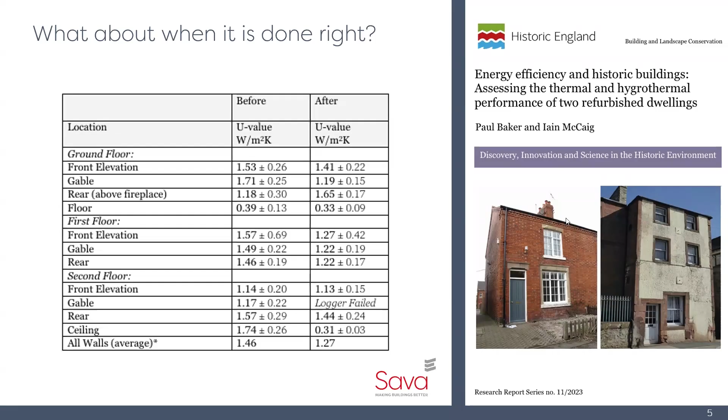But they also looked at the other side of it - is it going to cause a problem? Is it going to make something go wrong? Is it going to be an unintended consequence? They found that there kind of was, insofar as there was an increase in relative humidity within the structure of the building. They left data loggers within the wall collecting information about moisture levels, and looked at it - one of these buildings they looked at for 7 years, so they got some really good long-term data.

What they found is that yes, it was getting damp in the winter, but in the summer it was drying out, and drying out to a point where it was okay. As we all know, moisture is a problem, but it's a problem if it hangs around. If it gets wet and dries out in a reasonable timescale, that's no issue really - it's just passing through, moving in and moving out. It's kind of how these buildings were intended to be.

Also when we talk about vapor permeability, we talk about breathability - that's how they're supposed to function, and to their mind that's what it was doing. Now of course it was hanging around a bit longer than it might do otherwise, and what they found was the material they used was retaining water against the wall, but still drying out sufficiently.

Obviously, you can't be certain - it's just one building, just one period of time, really ideally should know better. But from what they did, they said there wasn't an issue, and it's all really good. I like the study, it's well worth a read if you haven't read it already.

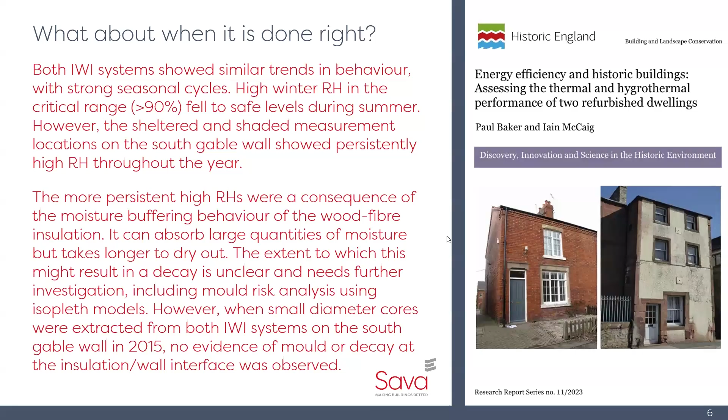With that in mind, I want to talk about cavity wall insulation, particularly in terms of location. We've been retrofitting insulation into our cavity walls for quite a long time now - it's a relatively common retrofit. It's probably the first of this, other than maybe upgrading windows - the first of the major retrofit projects that took off and was carried out. So it's fairly well understood stuff, isn't it?

We know we have our exposure zones, and we can refer to where our property is on the little map, and identify the exposure zone. That tells us the extent of water we're expected to get in a heavy downpour - how many liters per meter squared per spell of wind-driven rain. Depending on what area we're in, we can refer to that approved document and decide what level of protection the property needs from wind-driven rain.

Because obviously, if we're going to insulate a cavity, we are bridging the internal and external wall, which means we've got a route for penetrating damp. One of the biggest drivers of penetrating damp is always going to be wind-driven rain. Obviously we've got gutters and bits and pieces, but wind-driven rain is always going to be the biggest driver of it. So we know that if we're in an area of severe wind-driven rain, we're going to have to protect the property. We know an external masonry wall is never going to be 100% watertight.

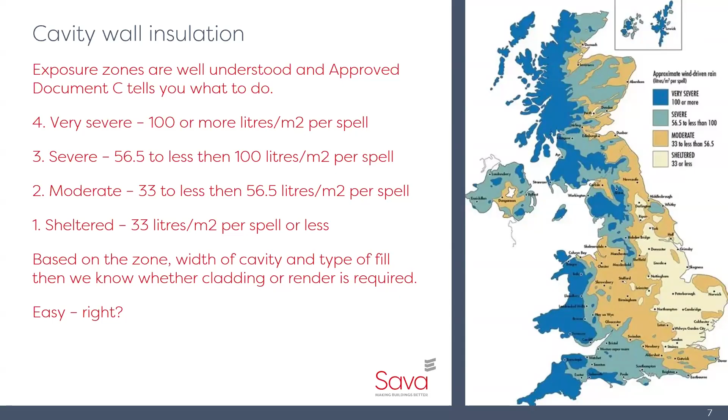So back in 2024, the Department for Energy Security and Net Zero released this report. What they said is that under projections for how the climate is going to change, we are going to see potentially up to 25% more wind-driven rain in some regions. The map on the right shows locations of weather stations.

Wait two seconds. Yeah, so please do. I was going to say, someone's put a question in. I will try and get around to those at the end. If I don't, you can bug me. We might run out of time, it's always possible, I talk too much anyway, but we will try and get to those towards the end.

So these are weather stations where they've measured the wind-driven rain. You can see that in some locations, the longer the line, the more wind-driven rain is coming from that direction, or more wind is coming from that direction, therefore carrying more rain with it. Some of these are fairly even, some have a big variance. Fundamentally, we should know our wind-driven rain, our prevailing winds, come in from the southwest. So we know the south and southwest corners of our buildings aren't going to be closed off.

That map proves it. But they're expecting an increase of up to 25%, based on predictions and calculations around global annual surface temperature increases. That's how we measure the underlying metric for climate change - global surface temperature change. And they reckon between 2 and 4 degrees, we can get 25% more wind-driven rain.

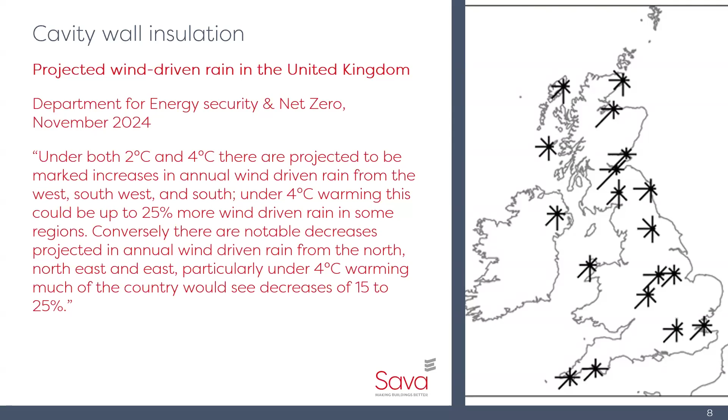One thing I will say is if we get 4 degrees global surface temperature change, I don't think we're going to be caring about the damp in our buildings, because we're going to have much, much bigger problems as a species, as a society, as a planet. But these are the predictions that are out there. Even at 2 degrees, we're going to get some issues.

We can see here - so the approved document was released in 2004, right? This is the global average surface temperature change since 1880, just factual information collected over that period. We can see there's an increase in that temperature, and it's going up, and that increase is getting quicker. We find 2004 is around here-ish. So since 2004, we're looking at 0.6, we're now at 1. We've gone up by almost half a degree in the time this document has been out.

Our exposure zone map - I can go back to that in this presentation - is out of date. Simple as that. Technically it was out of date the moment it was released, because it's based on historic information, and we know the information is changing. But it's going to get more wrong the more time passes. As our temperature changes, as our climate changes, as the rate of change increases, this map is going to get more and more wrong.

And yet we're still building to it, still installing insulation based on that old map. Would I feel comfortable relying on it? Probably not. If I'm approaching a property I know is in a moderate area, I'm going to be telling my client, hang on, it's got insulation, there's a higher risk of problems, and that risk is going to increase over the short to long term. We know if your plan is there for 25 years - it's reasonable to own a property for 25 years - over that period they're almost certainly going to get a problem if it's in certain locations.

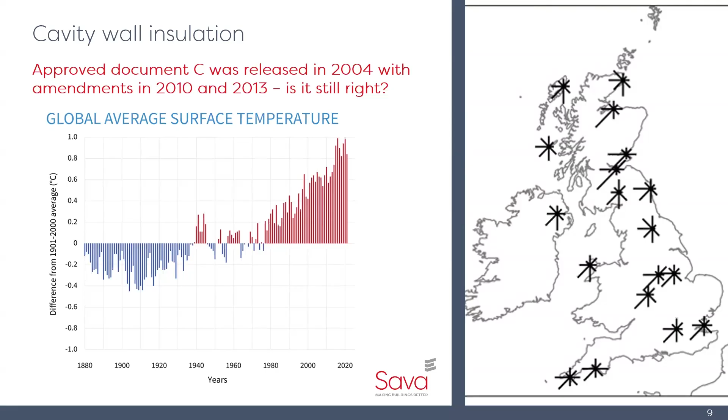As I say, we're only allowing for the current stuff. We're not allowing for the future.

That's where we, as the boots on the ground - the surveyors, the engineers, whatever your job role is - if you're on the ground looking at buildings, you're going to know your little micro area much better than anybody who's written a document intended to deal with all different types of housing, all different types of building, the entire built environment within a country. I know my patch - I'm based down here near Selsey Bill, in Chichester, West Sussex. So I understand where the risks are, the properties I see, and the level of risk in relation to those properties, and therefore I can tailor my advice to meet that level of risk.

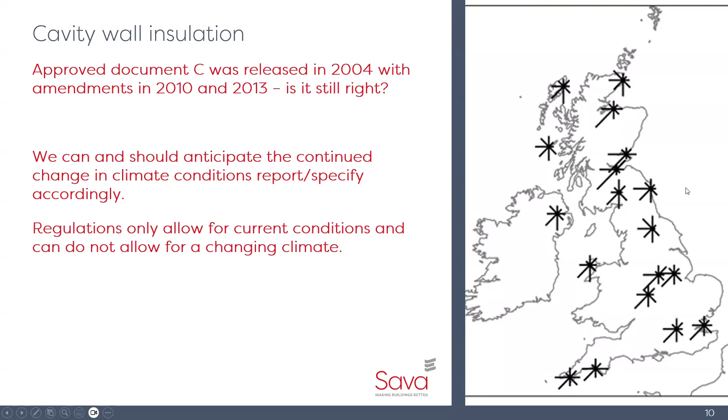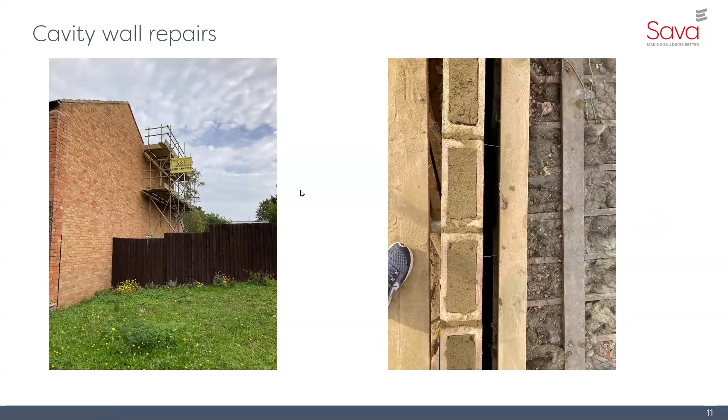We saw here that it was water getting in at certain points, rotting all of the timber. This here, literally, they were just removing bricks by hand. A lot of this had all just turned back to sand, and they were just literally lifting these bricks off, because it was just poorly constructed in the first place, or it had deteriorated over time.

Now, of course, if we'd just gone ahead and insulated that cavity before carrying out a full and thorough inspection and understanding what's going on and looking at it, then you'd have an additional problem, wouldn't you? Or at the very least, you'd have wasted your money on the insulation, because that's all going to have to be redone. It's certainly going to make a lot of this work more complicated.

And I will say, this building, literally hundreds of students have been through here, and they were accompanied by some really, really good surveyors. Sava use - sounds like I'm boasting, but other than me, they use some really, really good trainers, some very experienced, very knowledgeable, really, really good trainers, and really good surveyors.

And these surveyors have been there as well. Actually, they hadn't really identified this problem because you couldn't. There was nothing to see. It wasn't until one of them went, you know what, I think some of those cracks are getting a bit bigger. There was a bathroom below this, and it's starting to look a little bit like something's moving there. You're probably going to want to get this investigated further. It wasn't until they did that they started to realize the significance of some of these issues.

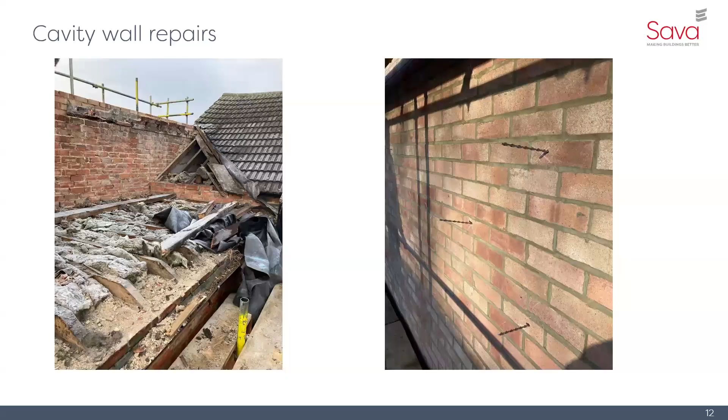But before then, for 5 years before then, something like that, nobody could really see that there was a problem. So just on that surface level inspection, it looked fine. And the easy assumption is we'll fill that cavity. But of course, we'd have some massive unintended consequences.

My client brought me in because they were concerned about movement to the party wall. There's some fairly significant cracks that were opening up. Turns out people next door had just decided to change the direction of the floor joists and hadn't taken account of the things that they should have taken account of. So we had some movement going on.

Now, of course, that wasn't the only issue I saw with some of the stuff they were doing. There was some real bodge up going on with the rainwater goods at the back as well. Of course, if you're gonna bodge one thing, are you really gonna make the effort with every other part of that installation? Probably not. Can we trust the quality of this based on the quality of everything else we've seen?

Probably not. Those that are residential surveyors probably are well aware of the case of Hart and Large. Lots going on in that case, some big figures in terms of the claim and the damages and how damages were awarded.

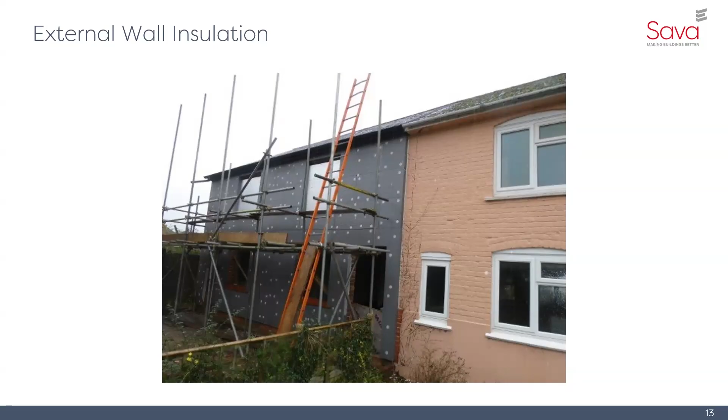Personally, I'm a bit more guided by people like Historic England. If you don't know, Historic England work out of a converted mill building somewhere up north - I live on the south coast, so everything's up north for me, but somewhere proper up north. As a converted mill building, Historic England aren't ones for massively changing things - they like to keep the heritage of buildings, and that's what they're for, and God bless them for that.

But they did decide actually they want to heat their building from a heat pump. If you look at a lot of the narrative and the stories coming out, trying to heat a converted mill building with solid walls and timber windows using a heat pump sounds like a recipe for disaster, given some of the things we're told through the press. But actually they're quite happy with it - used correctly, using the right pump in the right way, really happy with it.

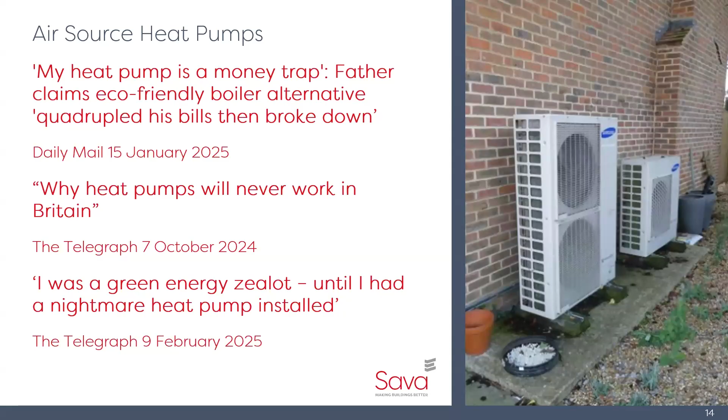But I'll give you this example. I saw at a property - so this is a heat pump that was installed for this building. This is a converted barn, converted I think 10 years ago now, maybe a little bit later.

Unfortunately, they had filled the loft with spray foam, which is always a concern - one of those we could have talked about as a retrofit measure with unintended consequences, but I think that one's been covered. If you don't know about spray foam by now, you probably need to go away and do some really hard thinking, so I'm sure we're all aware of the issues on that one. But obviously it was a concern, and as is common with all these installations, no paperwork, even though it was done as part of the whole renovation work.

Otherwise, just solid walls, no external insulation. Got some timber double glazed windows, but obviously very narrow, not particularly high efficiency. Underfloor heating, which is beneficial to the way air source heat pumps work, but nothing special. It wasn't designed as a high efficiency building - it was just a building, a decent enough barn conversion. And they fitted this air to water heat pump. So there are two types: air to water and air to air.

I'm focusing on air to water with this one. Air to air is something we probably may see more of in the future because of its ability to cool and everything else. But air to water is the standard one that we see, or is being pushed forward in relation to a lot of these buildings.

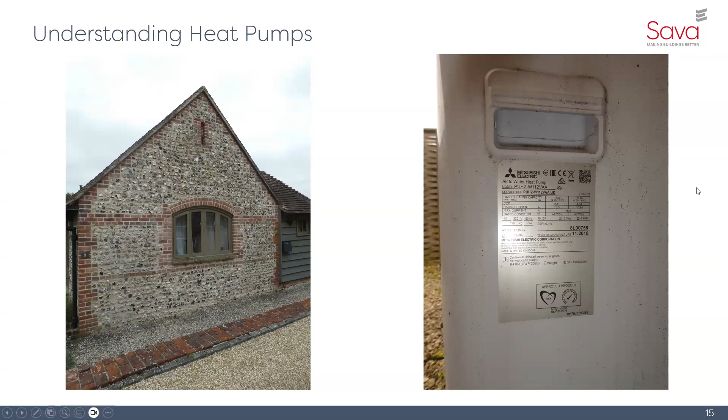So we kind of have to understand, this is the label on it. We have to understand what some of that means. So in this case, we have a rated heating capacity of 11.2 kilowatts. This is the amount of heat it can produce at optimal operating conditions.

Optimal operating conditions, nothing ever works at optimal operating conditions. This is kind of like your range on your electric car or your MPG, predicted on a diesel or internal combustion engine car. The manufacturer will tell you it's got a range of 350 miles, but in reality, that range will be very much dependent on how you use it and the external conditions.

And it's very much the same with an air source heat pump. How well it's used, how warm it is inside, and how warm it is outside will all impact that amount of heat that it can produce.

And then it has a coefficient of performance, so 3.34 in this case, which means that for every unit in, we get 3.34 units out. So this is 334% efficient at optimal conditions.

This property is 150 meters square, 8 rooms, underfloor heating, limited insulation applied to solid flint rubble walls. So we know that it's not the most well insulated, but this one is doing okay as far as we can tell. No signs of condensation that might imply unheated or not heated appropriately.

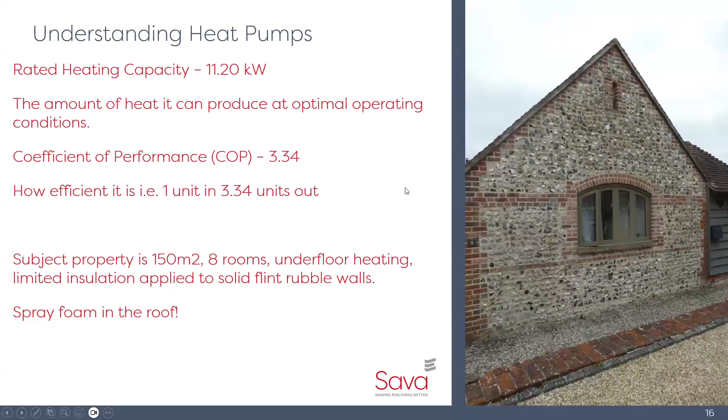Okay, so we need to kind of understand some of that. We also need to know the higher the demand, the higher the rating required. So if you have a lot of heat emitters, radiators or a big area of underfloor heating, then of course you're going to need a higher heating capacity, right? So 11.2 is okay.

It appears to be okay for this one. If I was looking at one rated at 7.3 and I've got quite a big house, I might be concerned. Now, of course, I'm not going to say that's definitely a bad installation, there's definitely going to be some problems with that. But I could say it's something that needs to be considered more deeply.

And it's exactly the same for gas boilers. If you've got a massive house and a puny little gas boiler, you're going to have the same problems. Nothing special about that. You put the wrong system in the wrong property and demand too much of it, you're going to be disappointed in it. So we need to be mindful of that.

Also need to be mindful of the coefficient of performance. It's affected by the outside temperature. The heat pump is drawing heat from outside and pushing it into the building through the expansion and contraction of the refrigerant. The colder it is outside, the less heat it's generating. And of course, the higher the demand, that's going to impact its rating, and that will drop it.

It's also affected by how the system is used. If you want your house warmer inside, then you're going to have to be pulling more heat from that heat pump, which means it's going to have to work harder. And of course, different people have different desires for room temperatures.

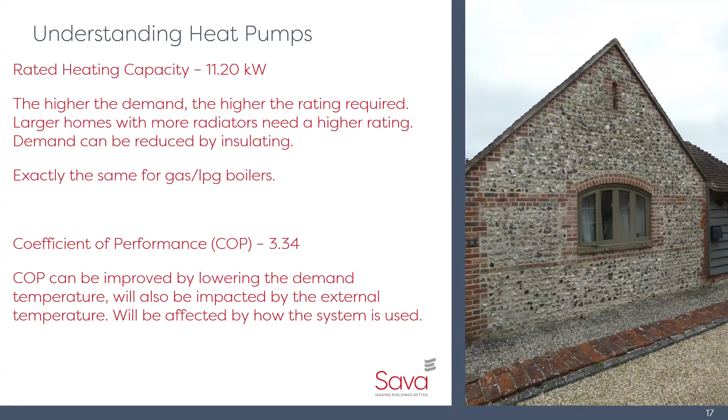As we said, unfortunately, we as built environment professionals, we can't really deal with the people. We can tell them, we can give them information. If they want to ignore that information, we all know it happens, and we have to just live with that. But certainly we can start to think about the fact that there is an element of training and understanding that needs to go along with any energy efficiency measure. If we do not train people to understand what they're getting, of course they're going to be unhappy with it, they're going to use it incorrectly, and we'll look at a specific example on that when we get towards the end.

Overheating. Overheating is a consequence of poor retrofit.

But of course, if we're highly insulated and relatively airtight, then we're trapping all that heat in. There is nowhere for that heat to go. Because insulation keeps heat out, keeps heat in - great in the winter, not so great in the summer.

And we have to accept that heat is a killer. I know we're dealing with everything in relation to Awaab's Law, condensation, mold, and all of the things going through that, and claims and disrepair claims in relation to that. I would not be surprised if heat was not the next big claim area.

And we know these claim companies, they're looking for the next thing. There is already plenty of evidence around levels of death and injury and illness occurring in relation to overheating in buildings. It's not so much the overheating during the day, it's overheating at night, where that affects sleep, stress on the body. People then are suffering the consequences of that.

So if we're not thinking about that in terms of our retrofitting, and not thinking about ventilation - not just in terms of how we remove moist air, but how we allow that building to stay cool in the summer.

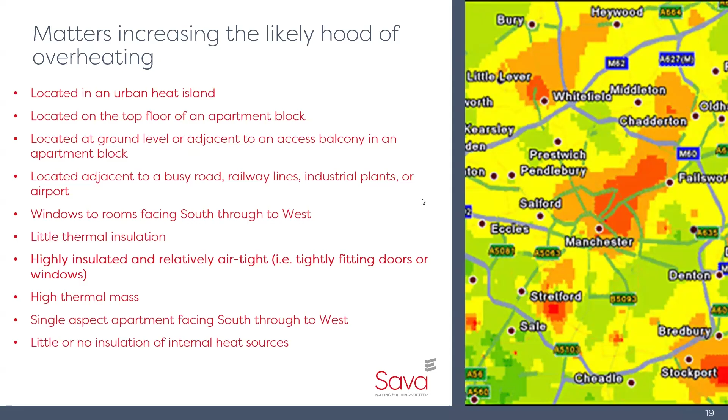Which sounds a bit strange, doesn't it? Because if you're going to upgrade the fabric of a building, that's a fairly fixed item. If I attach insulation to that building, that is staying there - unless you remove it, surely you're going to keep getting the benefit.

We know that if we insulate it, we're reducing the demand, the heat loss through the walls - and we looked at that study by Historic England. Reducing heat loss, so we must continue getting the benefit. But of course, they didn't.

The reason why is that people weren't doing the work, weren't operating their buildings correctly. They found people were overheating them and having to open windows to let out the heat in winter, because they got used to a certain idea of heating - turn it on, make demand on the boiler, get the property warm. Then it's too warm, so let's open the windows and let the air out, not thinking about that slow, steady build up and keeping a consistent temperature, and these patterns we use as human beings living in our buildings.

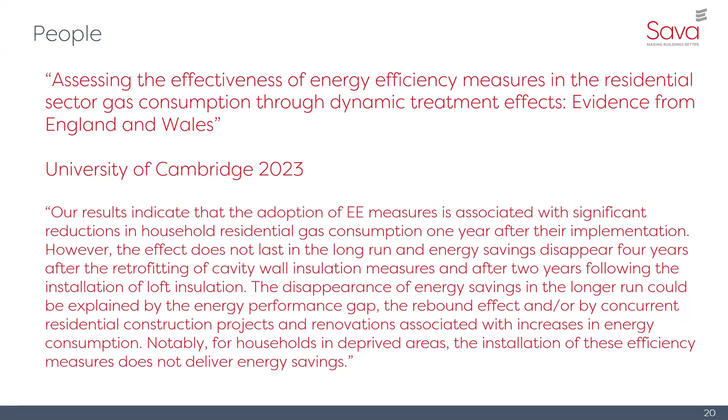Or if you're a surveyor looking at a building where energy efficiency measures have been added, you need to make sure you're giving some form of tailored advice around that, particularly with heat pumps - making sure even if you don't give advice directly, you signpost them to places where they can get better advice and understanding, or at least flag up that they need to do that. Or think about how you can give them sensible, practical advice to reduce consumption in terms of usage, not just relying on the fabric of the building to save all of that for them.